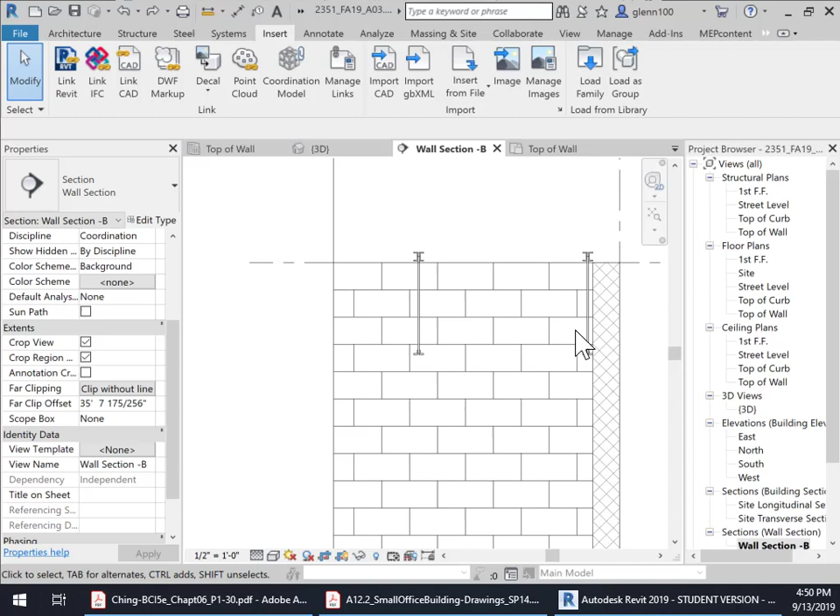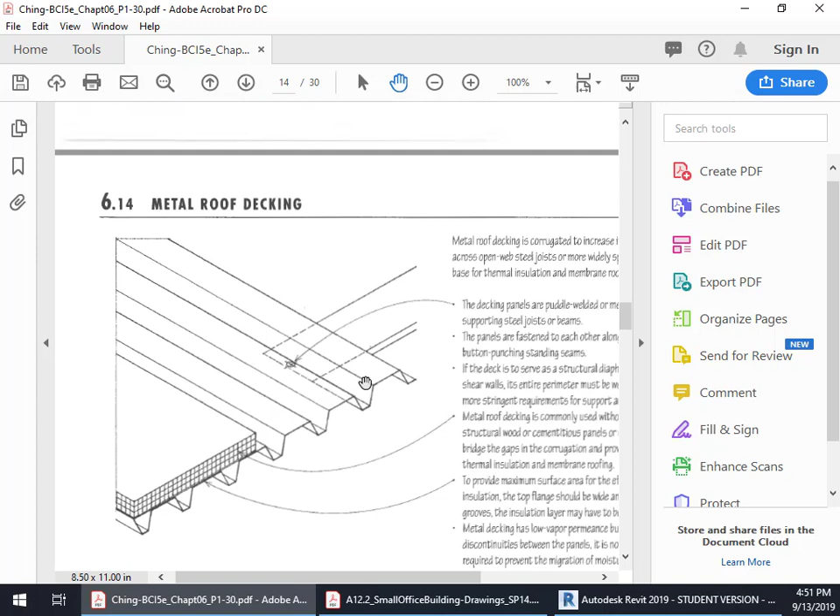Okay, now we're ready to put the roof deck on this. We've done the slab, we've done the walls, and all the joists, so we need decking to go across. To do that, we're going to use a steel deck. This is from page 6.14 in your book, a metal deck, what we call a ribbed deck. It's a roofing deck, and the 1.5 inch depth spans 4 to 9 feet, so that's going to be great. We'll go with the 1.5 inch depth in our deck here.

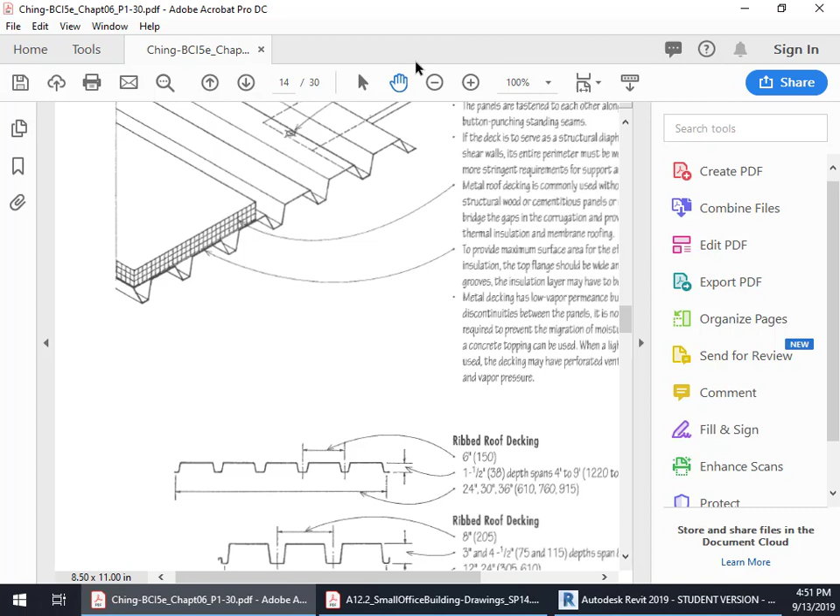One thing we want to do is finish off the wall and create the parapet before we put the deck in, so that the decking can be trimmed right up to the inside edge of the wall. We want the decking to come to the inside edge of that wall because we're going to do a parapet.

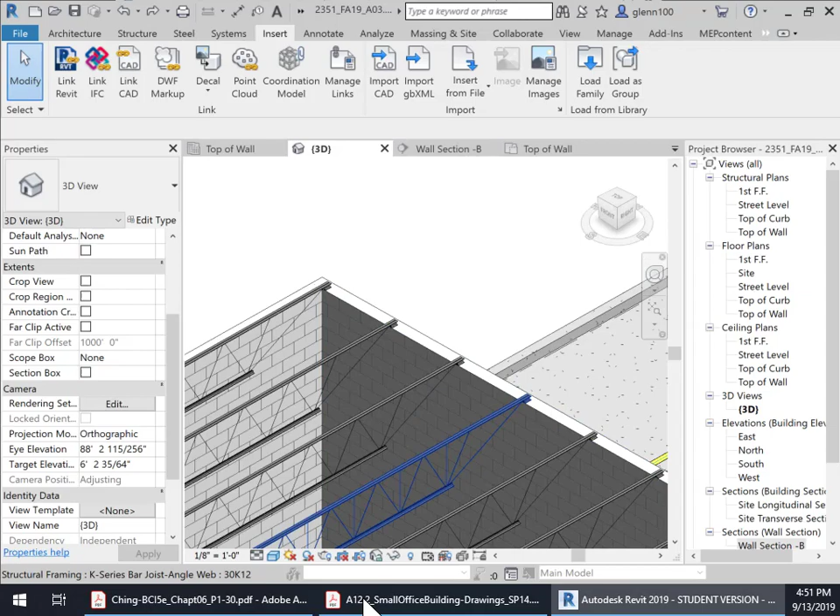What do I mean by a parapet wall? Let's scroll up here. This is a parapet wall. Here, this is a non-parapet bearing wall, what they call a flush edge bearing wall. But we're going to do a parapet. We're going to build a parapet, and we'll just say 3 courses, 3 blocks high.

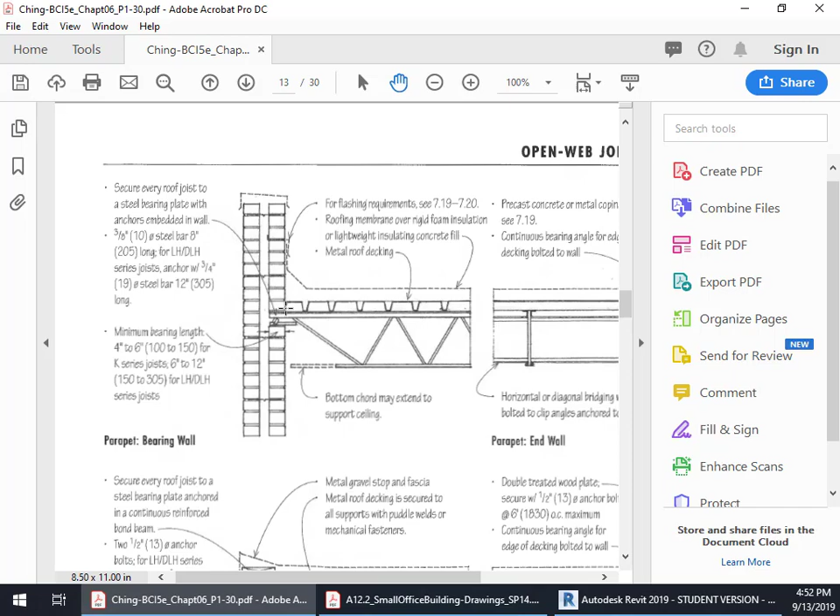So we're going to move that up so that when we put the deck in, the deck will trim right to the inside of the wall. All we really need to do in this case is just extend the wall up to the parapet height.

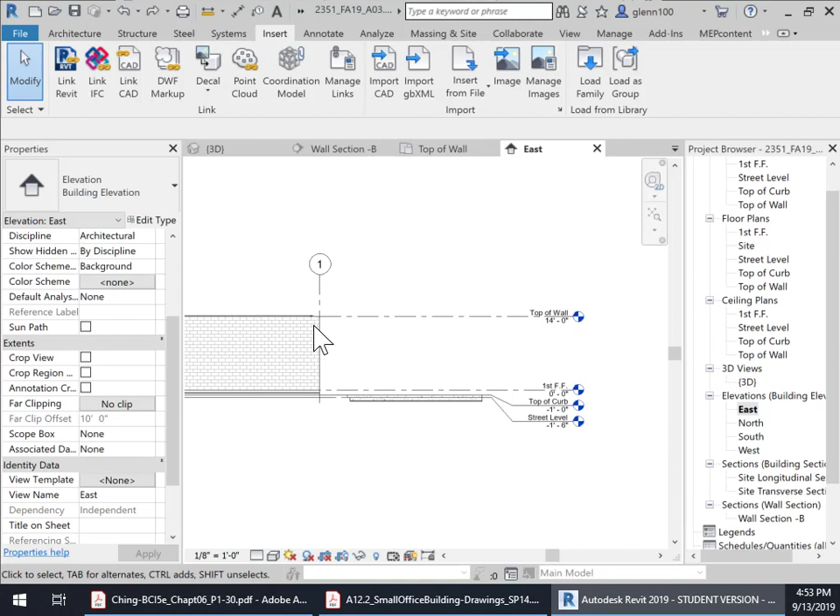To do that, I'm going to come in and go into an elevation. It's probably the easiest way to do that. Let's zoom in here a little bit. Okay, I don't know why that elevation is way down there. So we're just going to add, we can see our little tops of our little joists right there. What we're going to do is add another level in here.

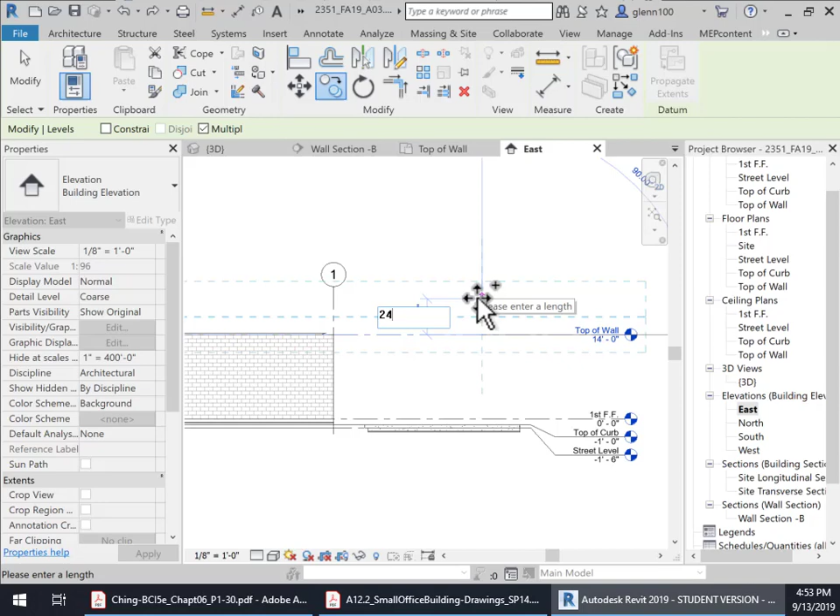To do that, I'm just going to copy this. Now, the only problem with copying levels, as you'll see, when I copy this and go up another 3 courses, which is 24 inches. So I'm going to type in 24, okay, and create this level 5 or whatever it is. Oops, I didn't mean to put that one in.

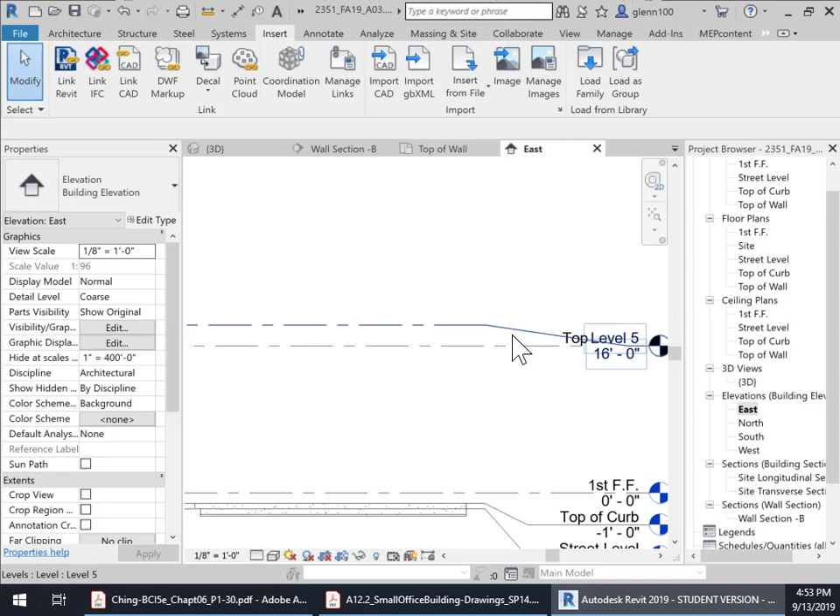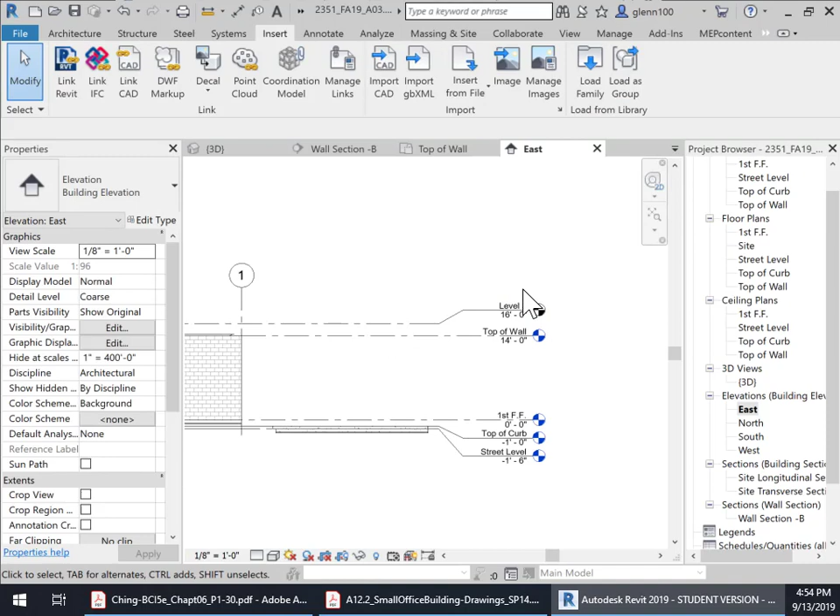Then I'm going to select it, break it so we can see it a little bit better. I'll line that up with that and put this. There we go. Okay, so now our wall is 16 feet tall, and we can play with this and line this up. But now we have our parapet, and I'm going to name it exactly that, top of parapet.

So let's zoom in. Sometimes it's hard to select things if you're not close enough. Okay, top of parapet. And so now we have where the parapet's going to end.

Basically what we can do is go in, select those walls. I'm just going to use select all instances since those are the 4 walls that we want to extend, or the 4 instances of that wall, so our entire project. Then you'll see right here, the top constraint right now is the top of the wall. I'm just going to change that to the top of the parapet, and then apply it. And boom, now if we go back into our 3D view, now this is up where we want it.

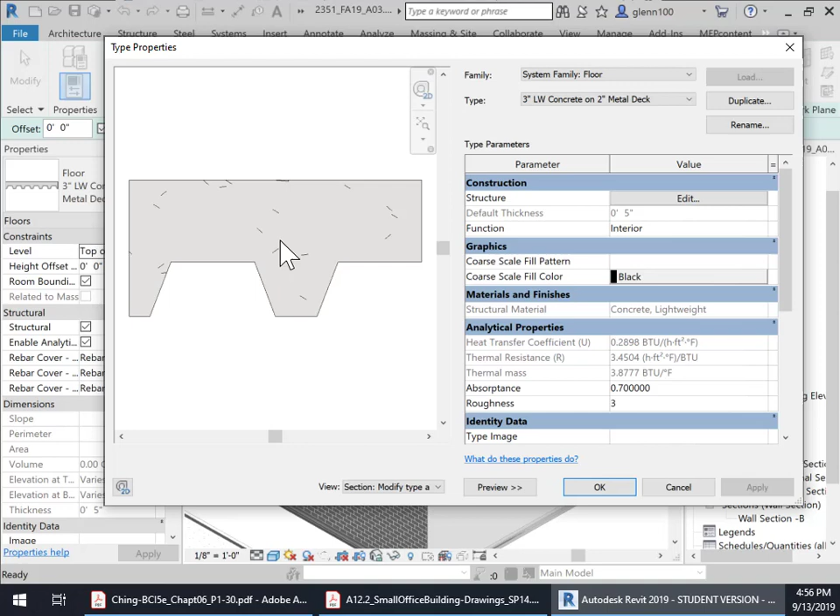And now we can come in here and put our deck in. So the next thing we're going to do is just add our deck. Now, the one thing about the decking is that the ribs need to be perpendicular with the beam. In other words, they need to run 90 degrees to how the joist or beam is running. We want those ribs running in this direction right here. So just remember that when we go in there.

So what we're going to do is go into structure, and they don't really have a structural roof mode. We have to use a structural floor. All you're doing is developing the floor system. We're going to go in here and you'll see there's a 3-inch lightweight concrete on metal deck. We don't want the concrete, or we don't need the concrete. We will when we do floors, but I'm just going to go ahead and edit this type.

We're going to duplicate it, and then I'm just going to call this a 1.5-inch metal deck, and I'm going to say only here in small letters.

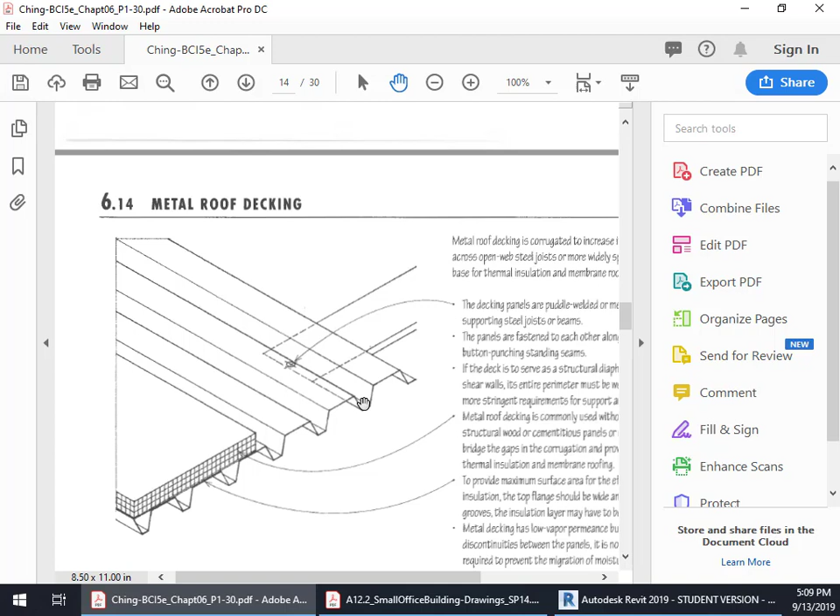Now we've opened up and renamed that 1.5 inch deck, and what we're going to do now is edit this. You'll see here's our deck, and here's our concrete, and we don't need or want concrete in this case. So the first thing we've got to do is select the structural deck here. You'll see that as a component it's separate, and it'll say structural deck, and right now it says zero, zero, and that's because it's not being used as structure.

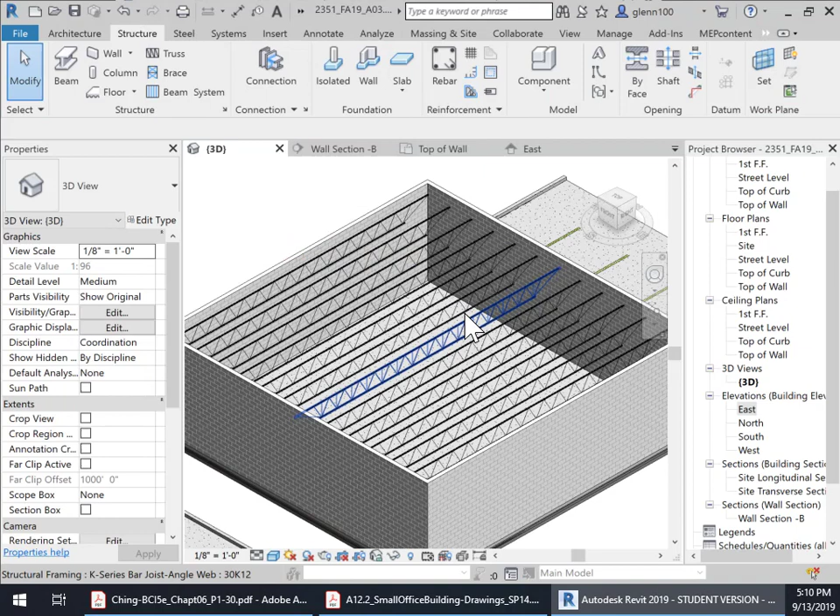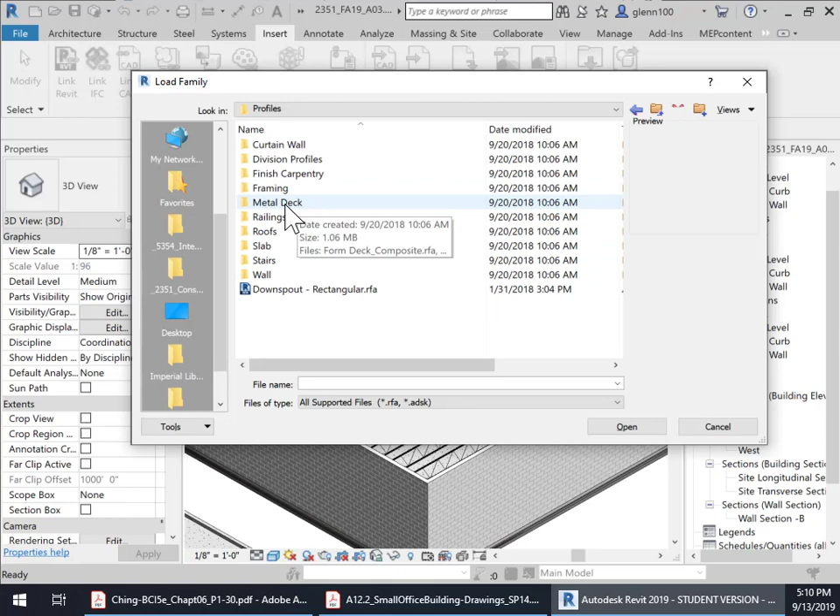Now, when we talked earlier and looked at our decking here, we determined that all we needed was 1.5 inch deck to span the distance. So we want 1.5 inch deck. What we're going to do is have to choose from a different deck profile. These are profiles that are used to do an extrusion for the decking, and you'll notice this is the only one we have.

So for right now, I'm just going to close this down and say OK. We'll save what we've been doing, say OK again. And then I'm going to go in and load in. I'm going to have to cancel out of my floor/roof here and go to insert, load a family.

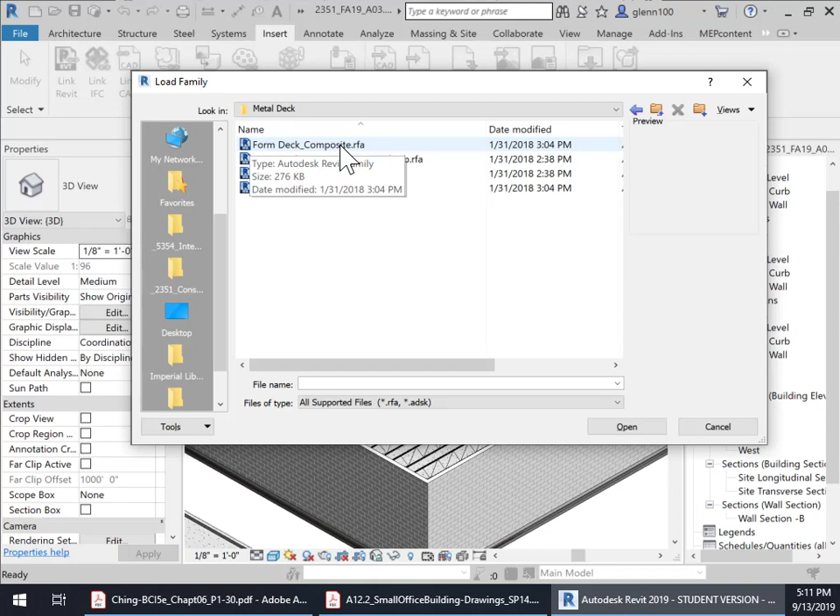I've already been here before, but if you go into US Imperial and go down here to profiles, you'll see a whole variety of different profiles for walls and stairs and railings and all kinds of stuff. And metal deck is right in here, and you'll see two types, non-composite and composite. A non-composite deck is one that just uses formwork for the concrete, so it adds nothing to the structure. There's no structural, it's fairly thin, and it's used just as formwork.

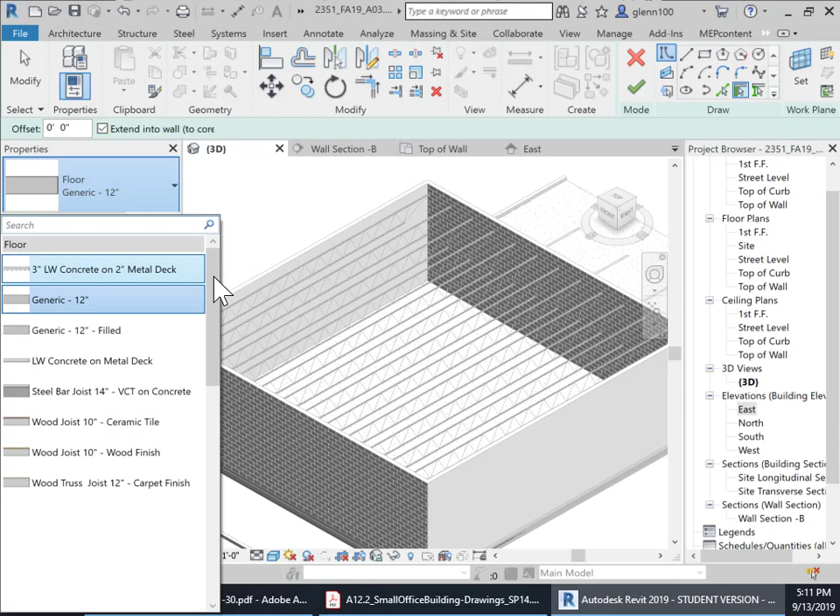With the assumption that the deck and any rebar or wire mesh we put into the deck is going to be its strength, it's going to come from that. But in this case, we want to use a composite deck, because a composite deck implies that the metal's thick enough to actually span and provide strength.

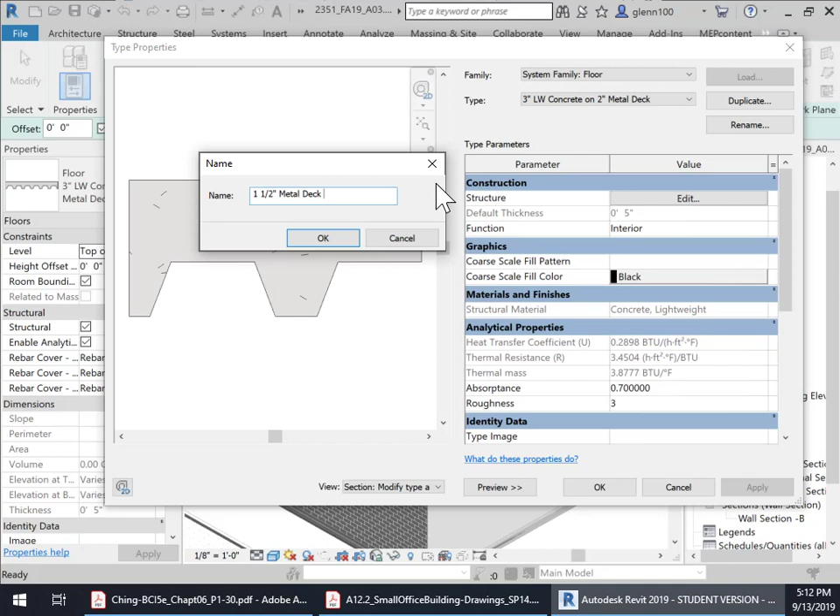So we're going to open all of those and then go back in now to our structure, go back into our floor/roof. We saved, we should have saved, didn't we? Did we not save it? I thought we saved it. Oh well, we'll just go in real quickly and create it again, I guess.

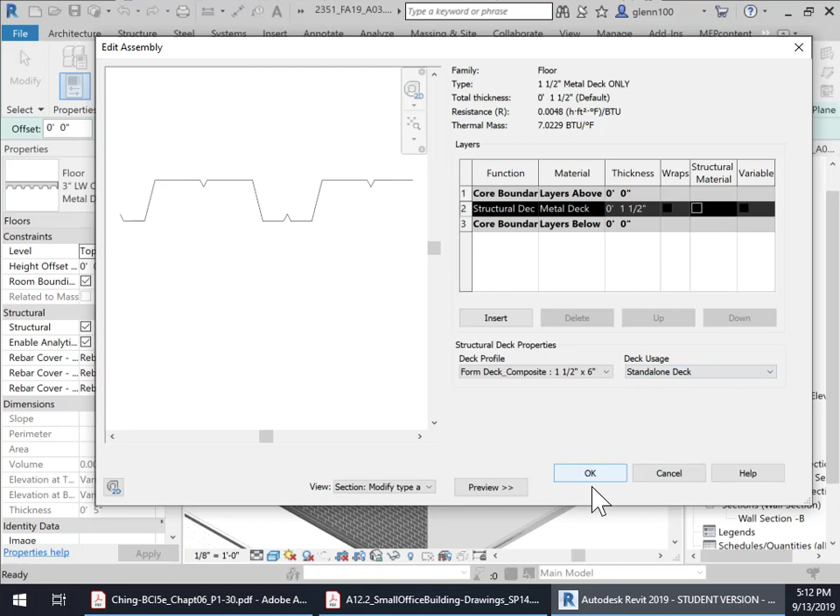I guess we didn't save it. Okay, duplicate it. 1.5 inch metal deck only.

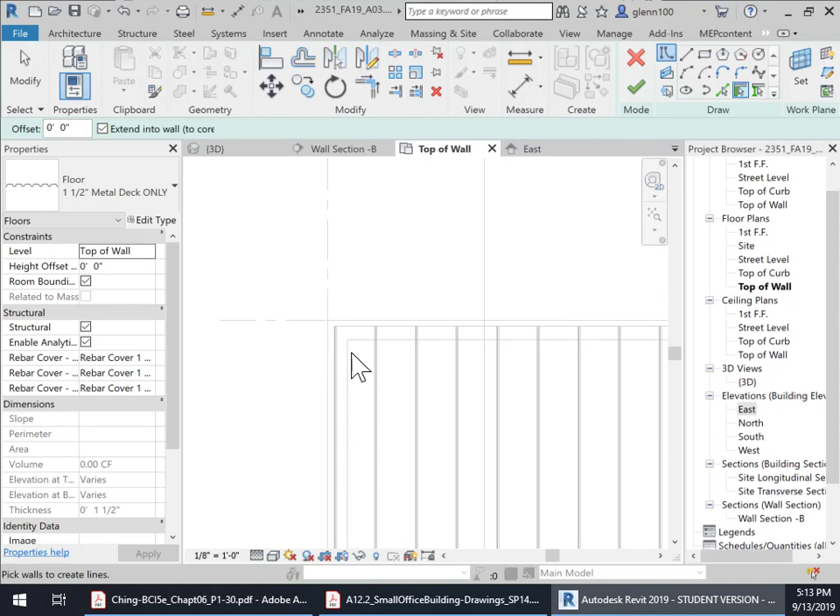And we're going to go into edit here. Once again, select the structural deck. We're going to say it's standalone. We're going to delete now the concrete because we don't need it anymore. And then if we go in here and look at deck profiles and open this up, voila, we now have 1.5 inch deck profile. So we're going to select the 1.5 inch deck profile.

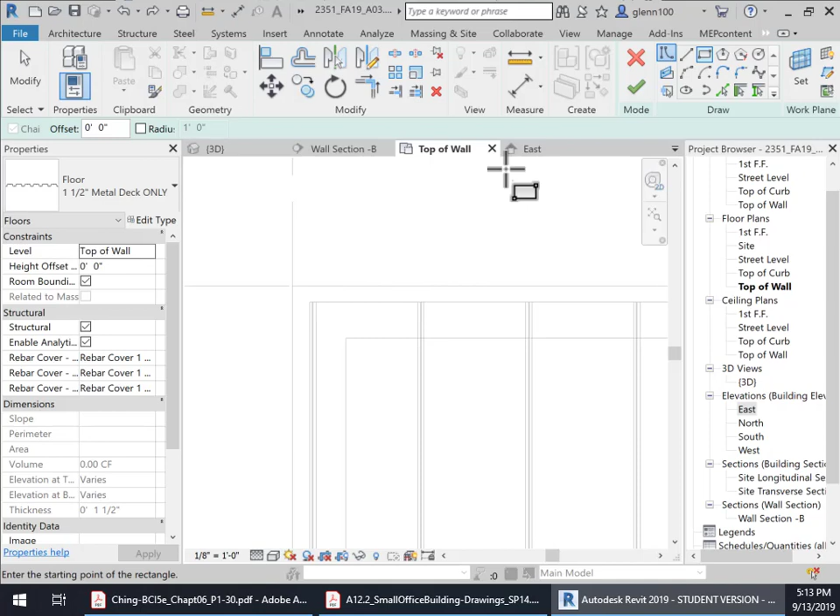And that should do it. So we're going to say OK to that, and then OK to that. And we now have 1.5 inch deck, and it's pretty simple from that point on.

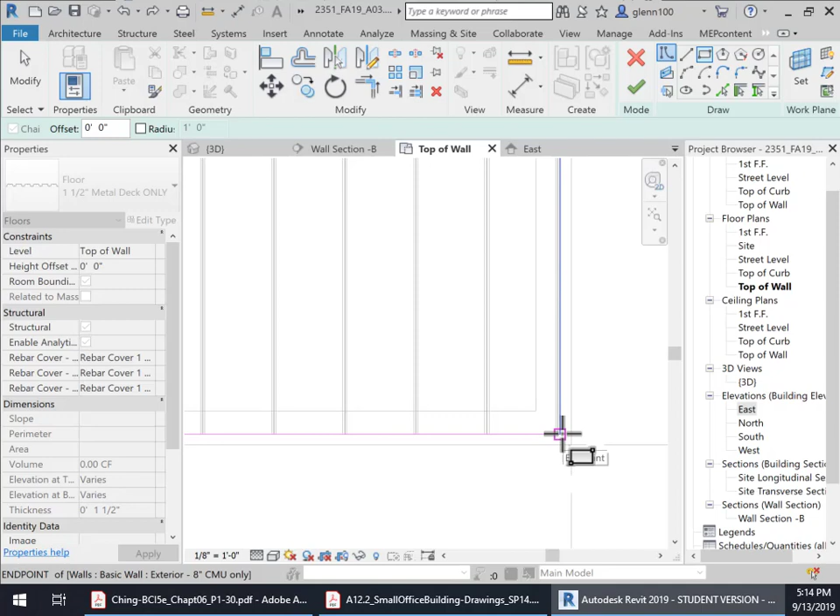All we're going to do is from the center of that wall, I went back into my top of wall, and from the center of the wall here, I'm going to draw that deck. So I'm going to snap to the end point of that center and the end point of that center, and I'm going to lock those into position.

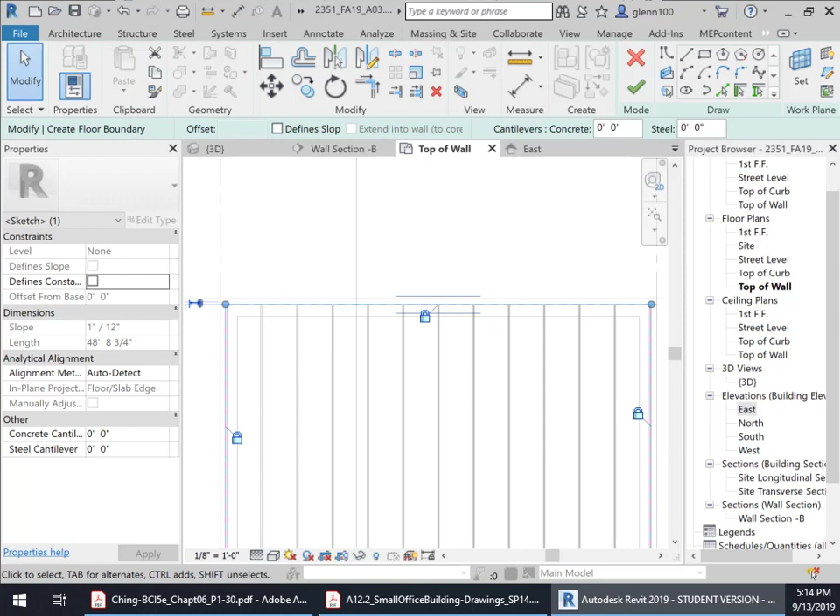Oh, no, no, no, no. I don't want it to the center of the wall. I'm sorry, I just messed up. I'm going to undo that and undo that and undo that. And we want it to go to the inside of the wall, okay? Because once again, our parapet goes up, right? So if we went into it, we'd be embedding it, we don't want to do that. So we're going to go to the inside of the wall. I'm going to snap to here and then to here. We're going to scroll over.

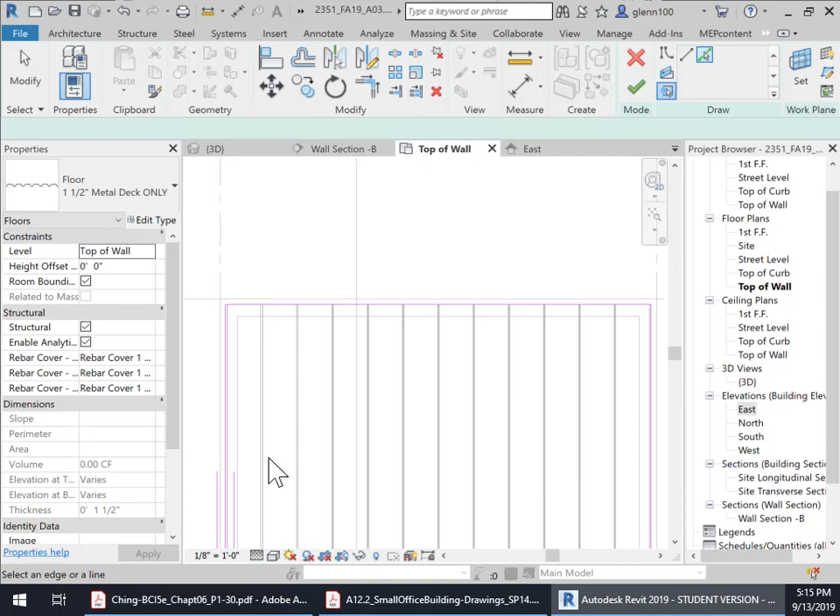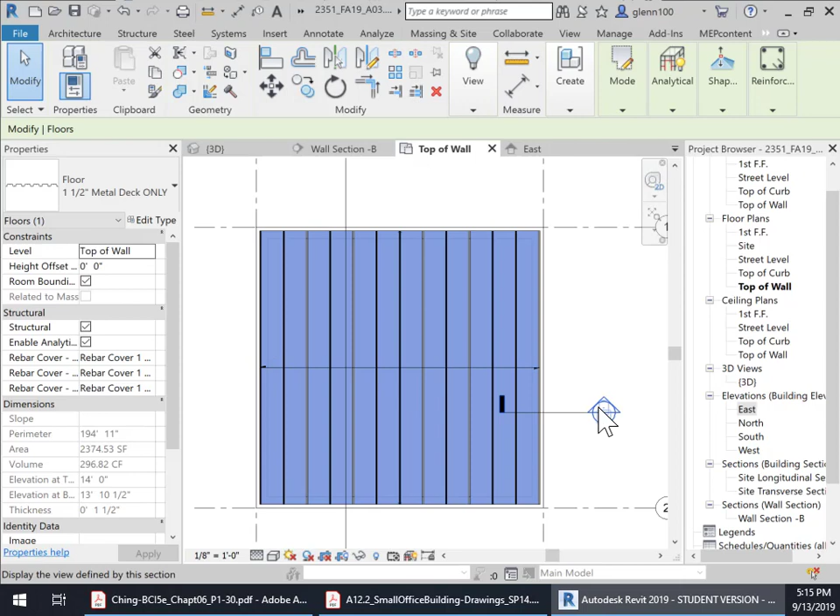I'm going to lock this to the inside of the wall once again so that if we move anything, our decking will move with us. Now you'll see these two bars right here, which indicate the direction of the span. The ribs are running in this direction, which is what we want. If it was running the other direction, we could select this and define a different direction.

We can also define if we wanted this to slope. But to define the span direction, we use this little icon right here, okay? That's the span direction.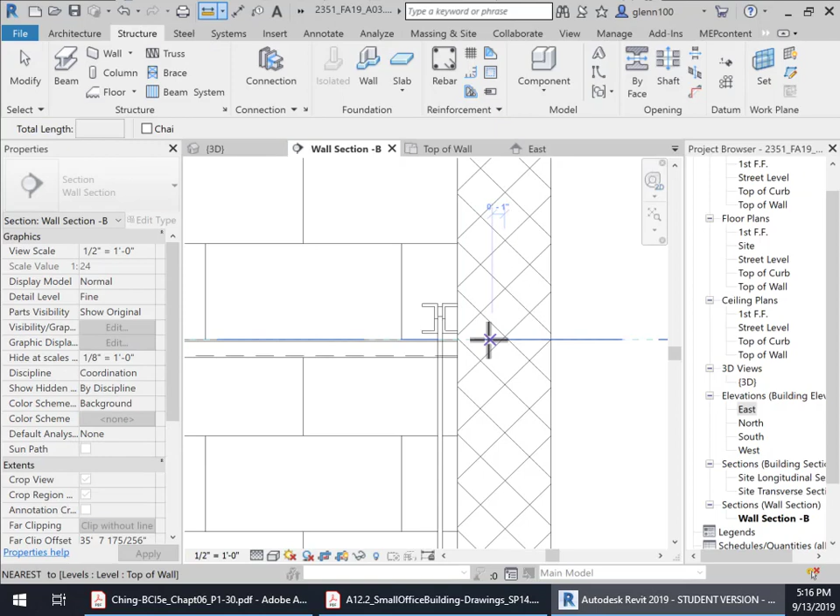Then we come in and select the line that is going to be the direction of the span. If I select this one over here, now the span is parallel to the joist, and we don't want that. So we want it in that direction. Now it's in the appropriate direction, okay? The ribs are running with our wall section there. So I'm going to say OK to that.

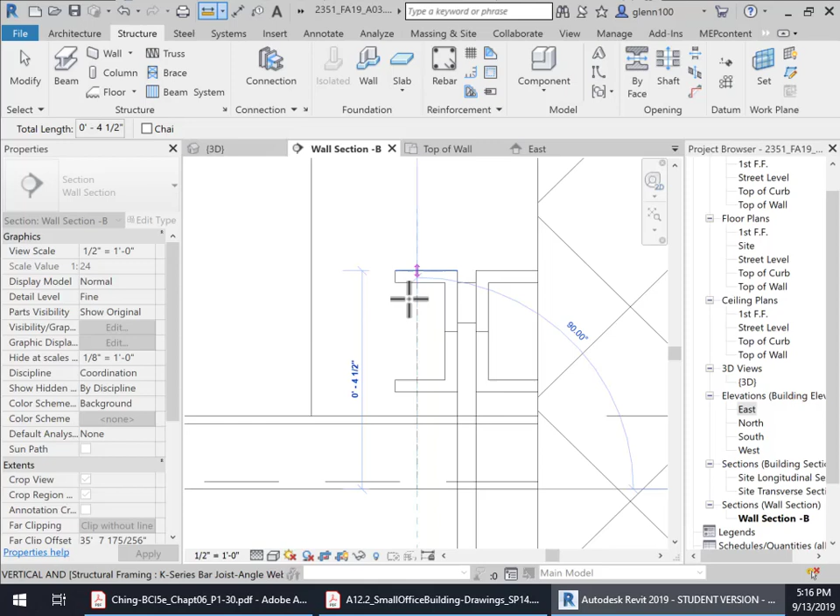Now it appears I can't tell if it's sitting on top of the deck or not, but let's go into our wall section here and see. No, it's not. Okay, so we want it to offset, and we want it to offset from here to the very top of there, right?

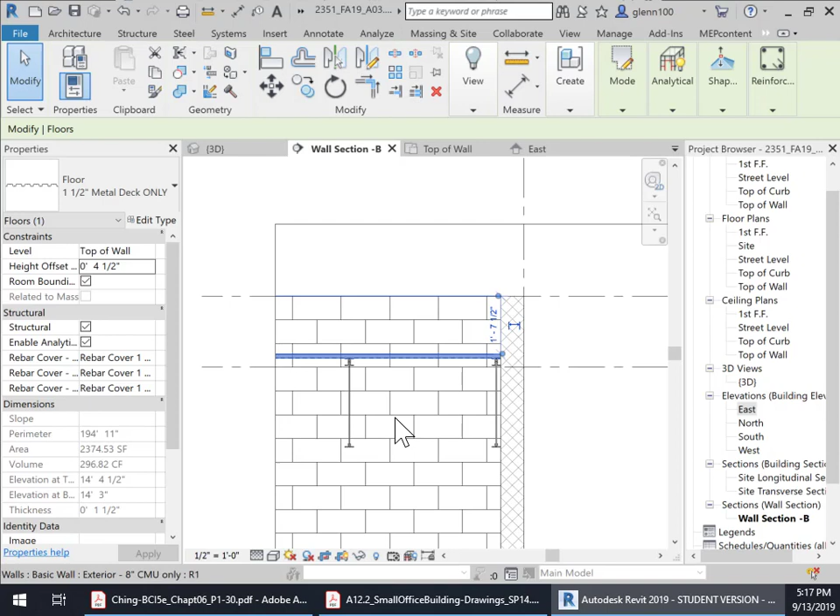So we're going to use an offset, but we need to know what that distance is going to be. And so that distance is going to be from there to... 3 inches. I think it probably has to be also including the depth of this.

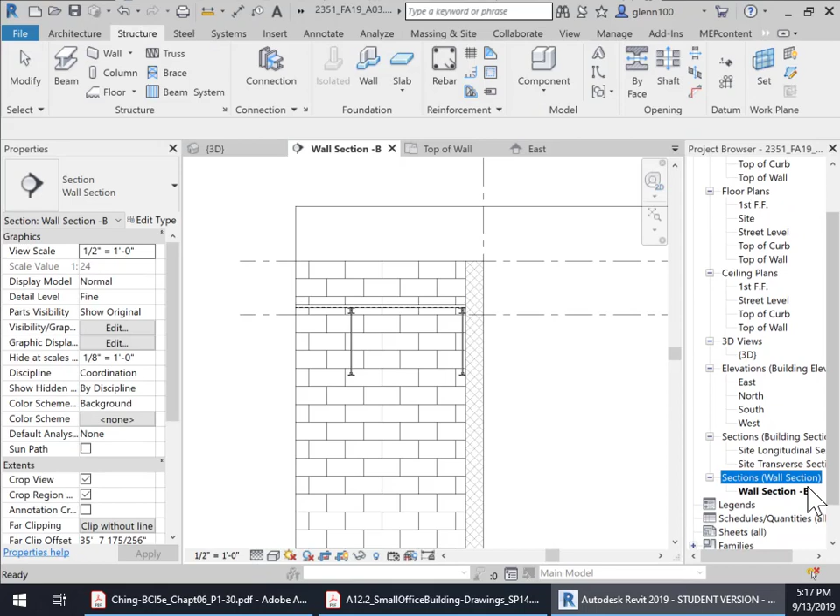So let's measure that again. We want it from the bottom here to the top there, right? Come on, quit snapping there. I need that to be perpendicular. There we go, 4.5 inches.

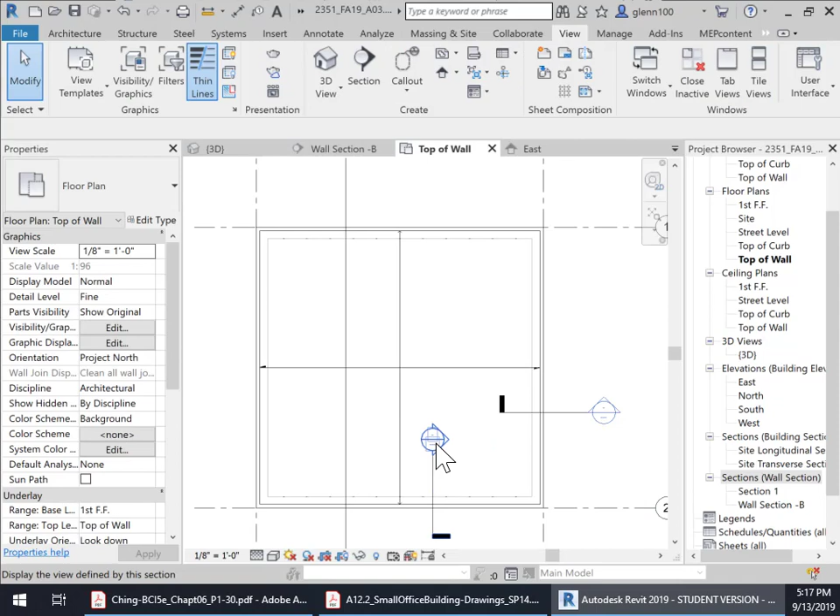Okay, so I'm going to select that. We're going to offset it by a positive 4.5 inches. Then we'll apply that. And now our deck is sitting up on top of our joist, which is where we want it. Okay, we've got it in the right place.

There's a lot of things we need to do to finish the enclosure of the building, but we're going to do that when we get into enclosure or the envelope of the building. The only other thing is, let's take a look at this. You'll notice that we don't see the little ribbing. That's because our wall section is cut parallel to the ribbing.

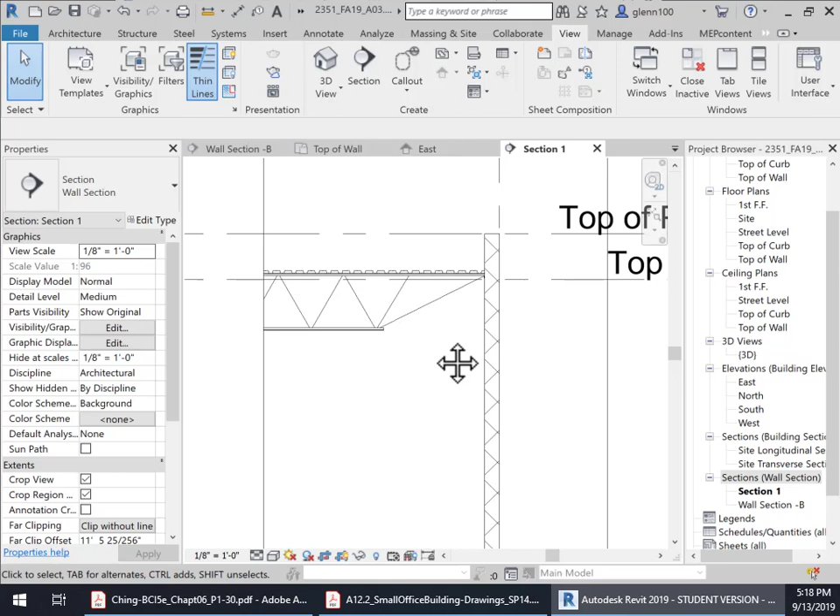So to see the little ribbing, we need to look at it from the other direction. To do that, we're going to create another wall section right here. So let's go to top of wall, and we're going to create another view. That view is going to be a section, and it'll be a wall section, and we'll just do it right here, perpendicular to there.

Let's open that up, and let's set this to medium so that we can see more. And we can see here's our deck. Now eventually there'll be insulation on top of this, and then a roofing membrane. But right now it looks pretty good.

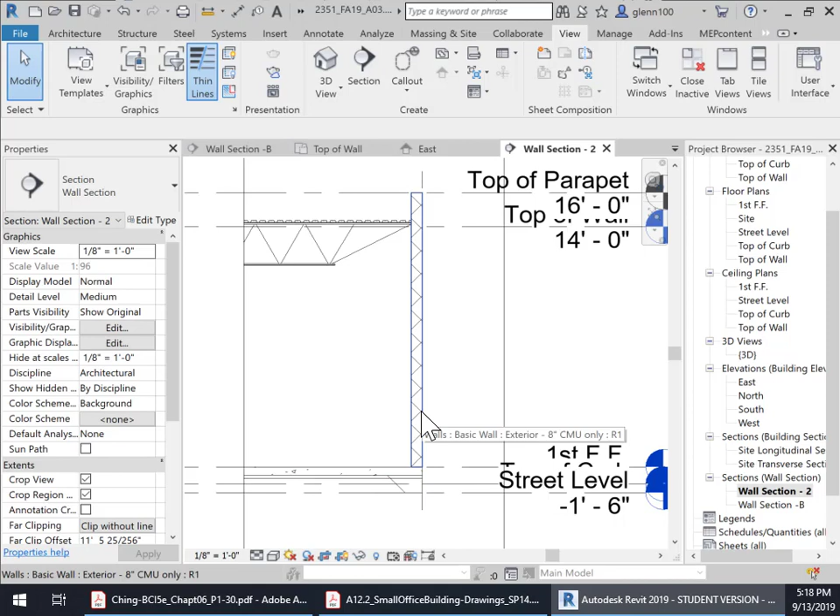So that really is all of the structure for this building. Of course, there's all kinds of stuff that has to be added to enclose the building and waterproof it, and everything, and of course interior systems. But that is... that is the...

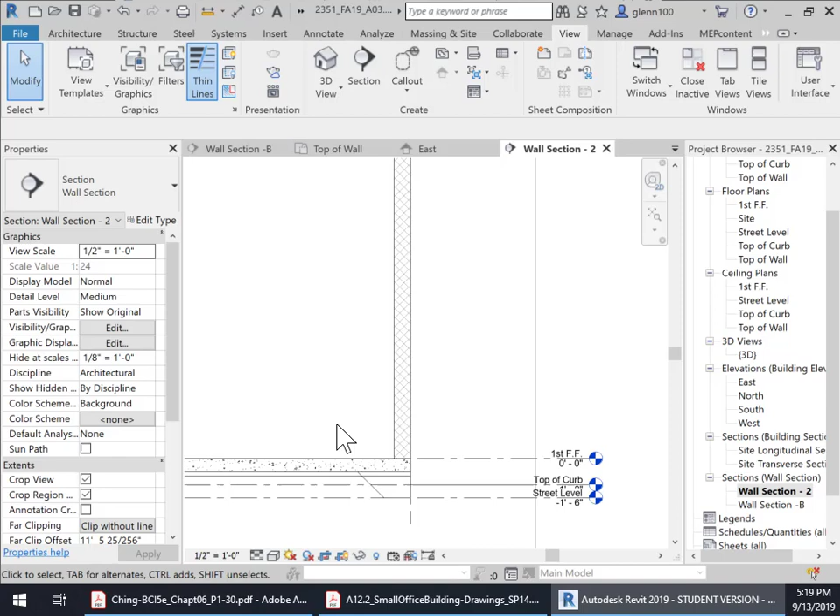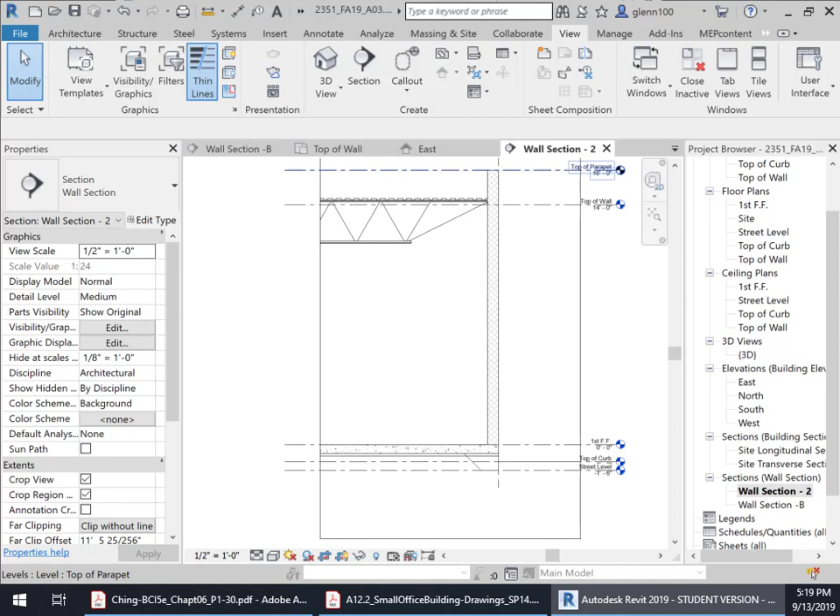So let me rename this, and we'll call this wall section, and it's along the two... grid line. I think that's right. Yeah, it's along the two grid lines, so we'll just call it wall section 2.

And so now we've got our footing in, we've got a slab in, we have our wall section in, and also then let's set the wall section to 1/2 inch while we're here. Where is it? Okay, so we'll set it to 1/2 inch so we get a little bit more detail.

And so you can see right here, this is our building pad right there. Well, that's the slab, but the building pad's right there. And the wall and our joist and our deck. And so that completes the structural elements of this building. And the next assignment, we're going to cover the structure of steel frame construction.